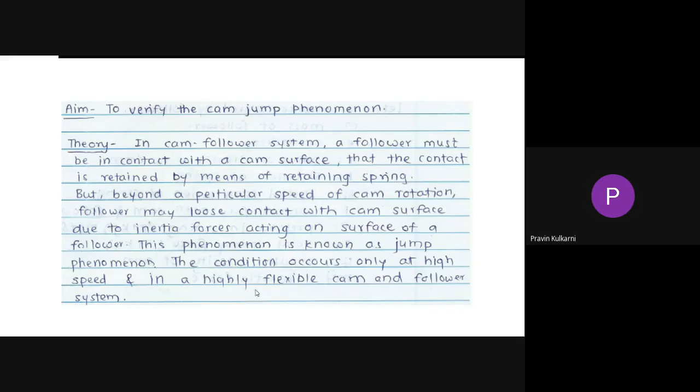So, I think this we have discussed, because as is our usual style, we discuss first and then we project the screen. Okay. The condition of jump occurs at high speed and in a highly flexible cam and follower system. So this we have seen. Now just read this out, because you are going to write this in your journal. How to write, what to do with the written material, where to upload, that I will discuss later on. Let's finish up the experimentation.

During jump, comma is there. During jump, follower loses contact with the cam surface, and when the follower reestablishes the contact, it may do so with severe... It's not sir, it's severe, huh? It is doing that with severe impact load that can damage the surface of the cam, and hammering noise, okay, can be heard at this speed. This we have discussed.

With jump, cam and follower separate owing to the excessively unbalanced forces exceeding spring force during the period of negative acceleration. The function of the cam follower system is to control and constrain follower motion. Okay. Also, life of cam flank surface reduces due to hammering, that is due to wear and tear. It also results in vibrations of the system.

Yes. The cam jump phenomena can be avoided either by increasing stiffness of the spring, or by limiting speed of cam, or increasing amount of preload of spring. Preload of spring. What is preload of spring? Again, we have to go back to the setup.

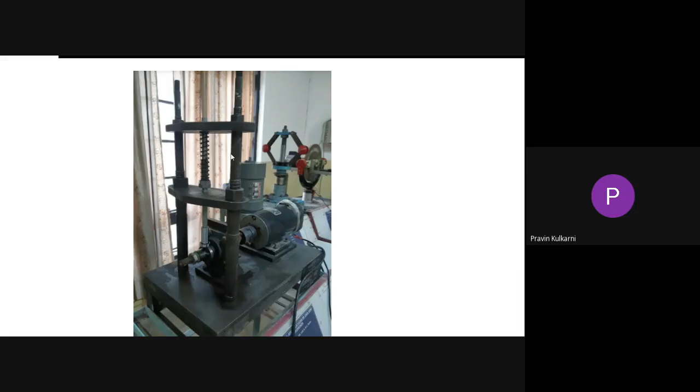Next slide. Let us try to understand the terms which are used in the mathematics behind this jump phenomena. Remember that mathematics is involved in all the dynamic systems. In fact, we can't keep aside mathematics while understanding the dynamic behavior. The system is in dynamic state. Remember that. So what is Y? Y is the distance covered by follower, or distance traveled by follower, or Y is the lift. See, if it is simply a circular disk, then ultimately it will not receive any lift. So what is lift of the follower? That we shall observe during experimentation.

M is mass of follower, E is eccentricity, R is radius of circular disk cam, K is stiffness of spring. So M, E, R, K are constant. These are called as system parameters. To change these parameters, what you have to do? You have to design a different cam or different follower. Okay. Next term, delta, is initial compression of spring. That is definitely variable by you and me.

Now, the cam is going to exert some force onto the follower so that they remain in contact. So that is called as contact force. F is contact force. It is not face force. You have to change while writing. Preload of the spring is mg plus k delta. I was talking about this, the self weight of the follower and the k delta term. So these two terms are clubbed and named as P. Preload of the spring means k delta plus mg. So total spring force is P plus ky.

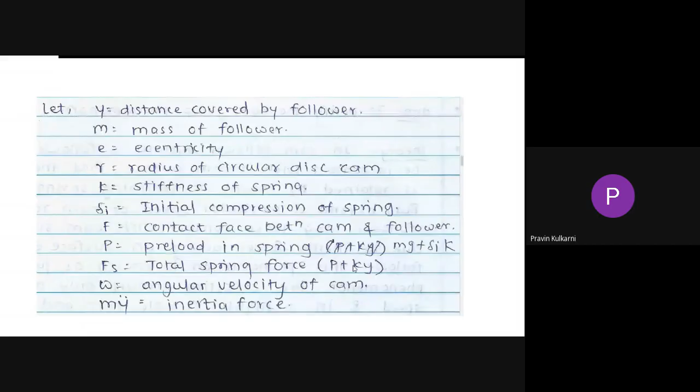Now see, spring is very important component of this setup. Now, when the motor is stationary, we are going to compress the spring. Okay. In the dynamic state, means when the motor is started, then ultimately further spring force will be due to lift which is gained by a follower. Try to understand this. Mg plus k delta is the static term. When we start the motor, then ultimately due to lift gained by the follower, you have additional force that is called as k into y.

It does mean that net force applied by the follower will be ky plus k delta plus mg. So keep in mind, three terms which are added, mg plus k delta plus ky. Are you getting my point? Now, RPM can be recorded by tachometer or stroboscope, that we shall do, and corresponding omega will be angular velocity of cam.

This inertia force. Now, in physics, we have learned that whenever the body is to be displaced, it must be given some force. Force is equal to mass times acceleration, isn't it?

So, acceleration will be caused due to the application of force, or you can say that whenever force is applied, that will cause acceleration. Whose acceleration? It is not acceleration of the cam, it is going to be acceleration of the follower. That is my y double dot.

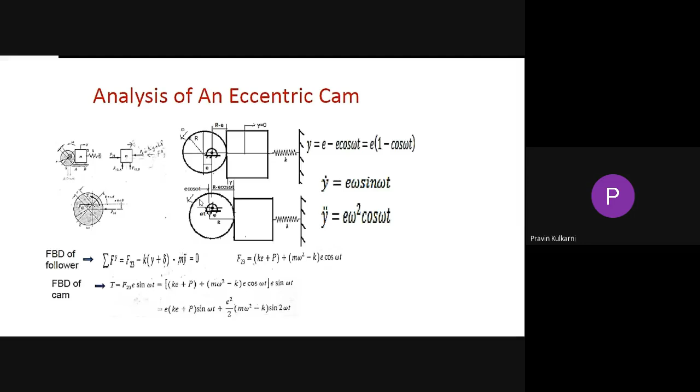Now as the follower is displaced in upward direction, the acceleration of the follower is in upward direction, meaning inertia force is in downward direction, spring force in downward direction, and the force exerted by cam on the follower, however, will be in upward direction. So next, now actually this is not needed. This is actually a part of dynamics of machinery. I will skip it. I will explain to you during dynamics of machinery. So with that, we have F equal to My double dot plus Fs.

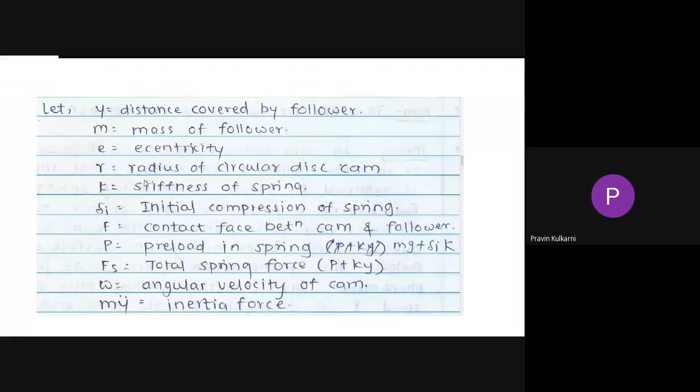We have discussed it is P plus Ky. What is P? You have to go backwards. P is called the preload, which is Mg plus K delta. So let's quickly go through that. F equal to My double dot plus, what is P? Mg plus K delta plus Ky. So finally you have F equal to My double dot plus Mg plus K delta plus Ky.

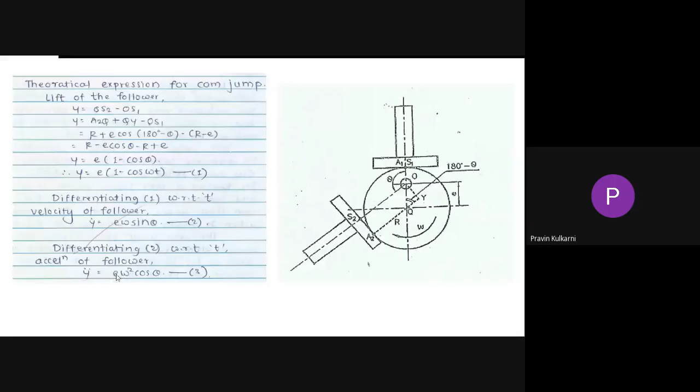F is equal to P as it is, but P is, remember, Mg plus K delta, plus K into Y. What is Y? Lift of the follower. It is given by E into 1 minus cos of theta. How we have derived. Plus mass of the follower into Y double dot. What is the equation of Y double dot? Yes, it is known to you. E omega square cos of theta. So you have F equal to P, Mg plus K delta, plus K into bracket plus M into bracket. You have F equal to P plus K into E plus, now these terms are simplified.

You have to work on equation number 4. All similar terms are clubbed together. You have minus Ke cos of theta. This is minus now. Minus Ke cos of theta and M omega square cos of theta. So cos of theta is common. In fact, E is common. K into E cos of theta with negative sign, and this is cos of theta. So for the second and third term, you have E cos of theta multiplied by M omega square minus K. This is mathematics.

What next? As already said, when the motor is stationary, the contact force is highest. That corresponds to the lowermost position of the follower. Remember, theta equal to 0, lift is 0. It means that the follower is in the lowermost position. Remember, at that stage, contact force is maximum, meaning you can put theta equal to 0.

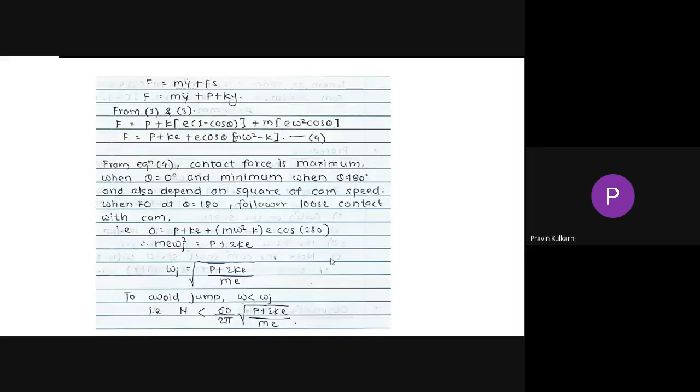So theoretically what we shall do: we know K, I will let you know that. K is known, E is known, M is known. P is mg plus k delta. Mg is also known. K is constant. So we shall put different values of delta as 2, 4, 6. We shall find out the theoretical speed first, and then we shall perform the experiment. We shall check for delta equal to 2 whether theoretical and experimental are matching or not, and then we can conclude based on that.

So the setup consists of an eccentric cam and follower with a follower spring, and at the jump speed the contact force becomes 0. Okay. The specification of the setup: it contains a DC motor, half HP, 230 volt. Spring stiffness is 892 Newton per meter. Free length is 106 millimeter. Mass of the follower is 0.354 kg. Cam dimensions OD, ID, eccentricity is 2.

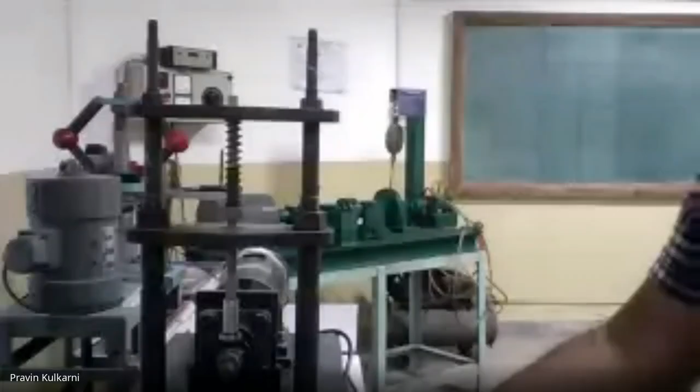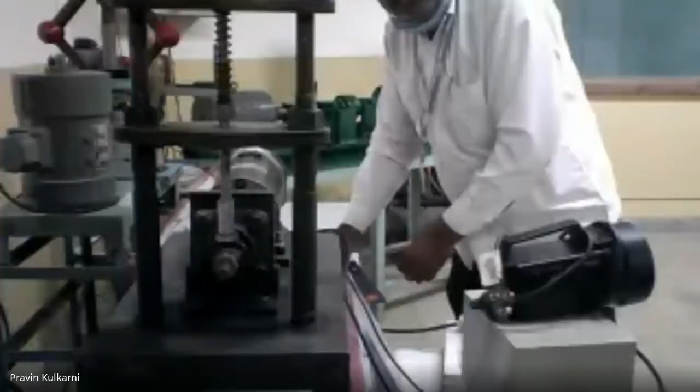Shubham and Himanshu, are you present? Or anybody, Joglekar, Surnis? Are you able to see my mobile? Yes, sir, able to see now. Can you see my mobile? No, sir. Speak loudly. Because see, I have to ensure that you see base and top. So can you see the mobile? Yes or no? No, sir.

Now, are you able to see? Yes, sir. Okay. Now, are you able to see mobile? Yes, sir. And you are able to see the two pillars, two columns? Yes, sir. Very good.

What we shall do now? We shall measure length of the spring, and it will be 106, no doubt. We shall compress the spring by 2 millimeter, isn't it? Then we shall start the motor and observe what happens to the noise. Okay, so please be attentive. Is video clear or blur is there? It is somewhat blurry, sir. That is going to happen.

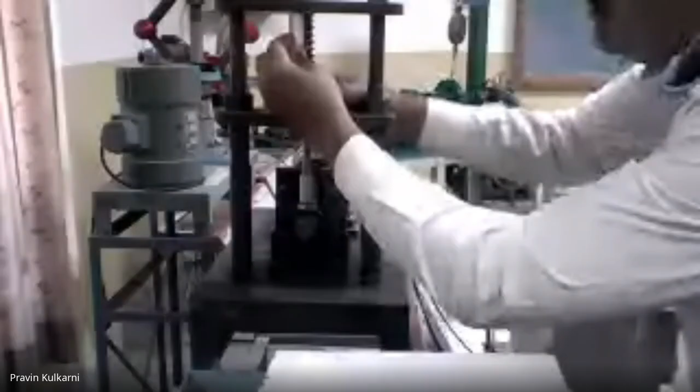See, with the help of the scale, the length of the spring is adjusted to 104 millimeter because it is 106 initial. Now it is 104 means deflection by 2 millimeter. Upper nut is taking care of compression, and the lower lock nut will ensure locking of upper nut. Once it is done, then the lower nut is locked. That is called as lock nut.

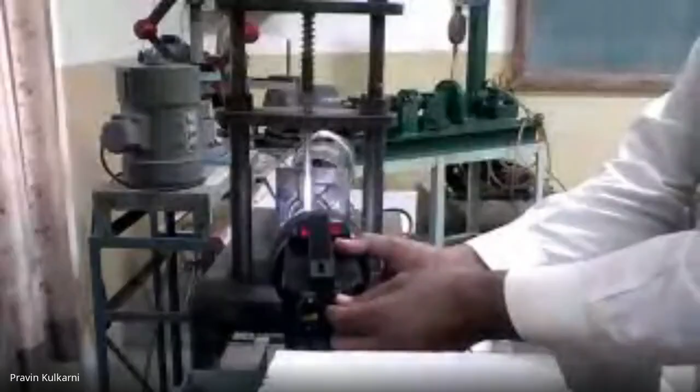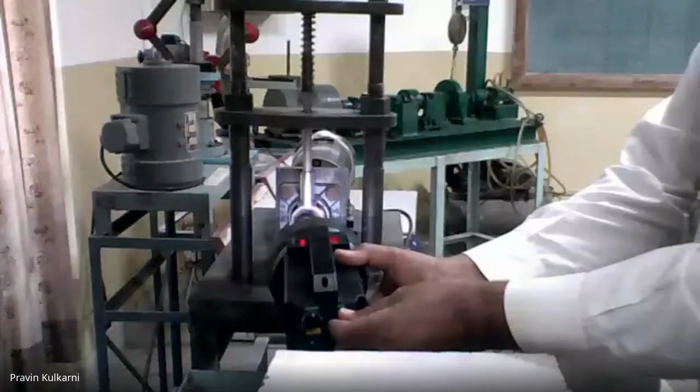Now, are you able to notice change in quality of sound? This is the speed which is to be recorded because this corresponds to loss of contact. This is called a jump speed. The follower is trying to contact the cam. While doing so, impact load is being applied onto the cam. So we shall record with the stroboscope. You might be knowing principle of stroboscope. When the frequency of flashing light matches with the RPM, the object will be appearing as stationary.

Now the cam is appeared as stationary. So please record this observation. The speed is 1288. At 2 millimeter, speed is 1288 RPM. Okay. Now what we shall do? We shall stop the motor, and again deflection will be adjusted to 4 millimeter. So I will write on group 2 millimeter, that has given us 1288 RPM, so that it will be referred later on. 4 millimeter, we shall enter the RPM. 6 millimeter, and then did you see the stationary cam?

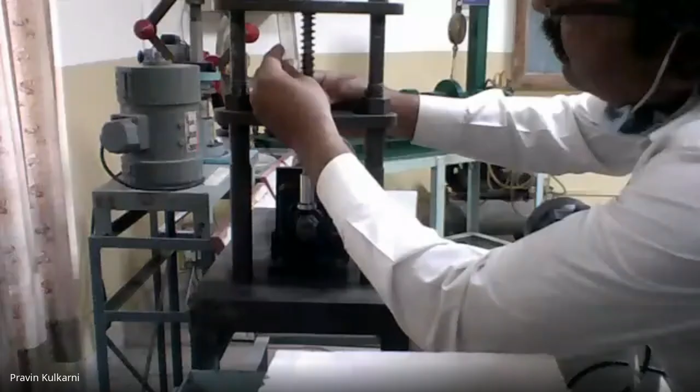Are you able to listen to me? Yes, sir. I'm asking you, when the lights were flashed by the stroboscope, did you notice that stationary cam? Actually, it was not very clear. Okay, means it was out of vision of the camera or it was blurry. What you mean to say?

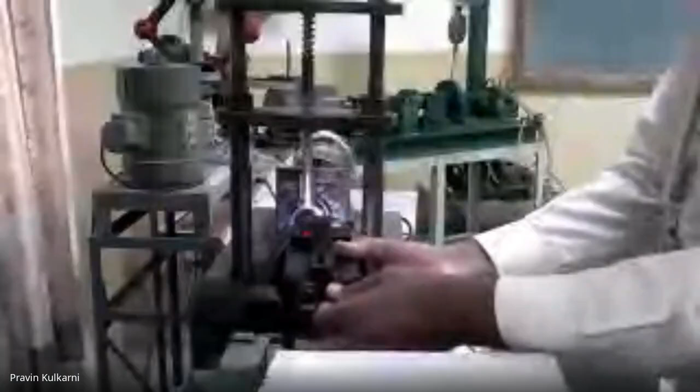Lag, but it was kept there for some definite point of time. So let's see. Now 4 millimeter. So for 4 millimeter, RPM is 1300. RPM is 1300, and there is correction for 2 millimeter. It was 1188. I repeat, for 2 millimeter it was 1188 RPM. For 4 it is 1300. The final reading, 6 millimeter.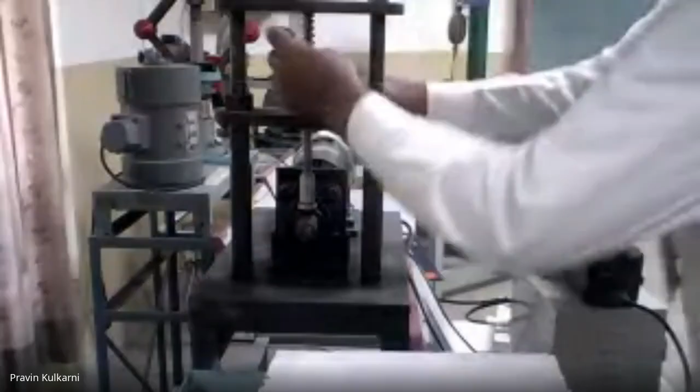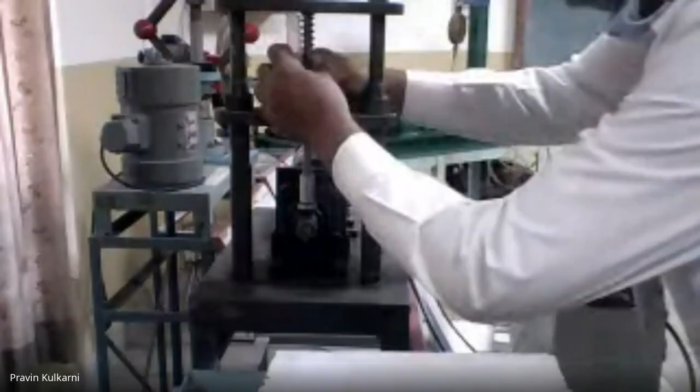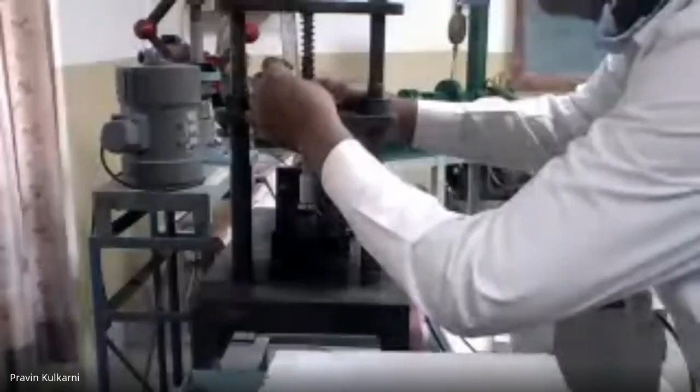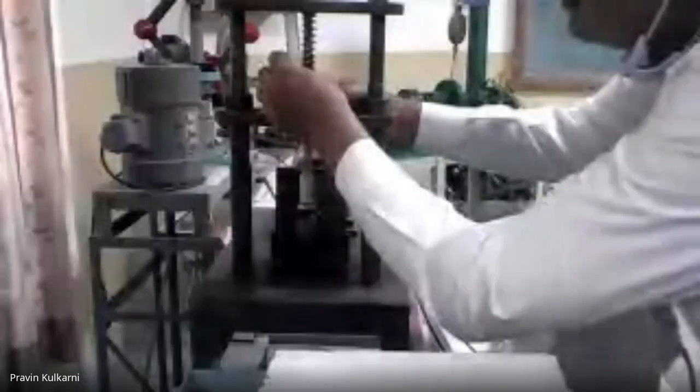Shambhat, 100. Now it is 100 millimeter as spring length, means deflection is by 6 millimeter. This will be the final reading. But don't leave at the end of the final reading. We have to discuss more on this. Now, this is the hammering noise.

So please note down, it is 1419. Well, thank you. So I have posted the readings on your group. So to summarize, for 2 millimeter, it is 1188. For 4 millimeter, 1300. For 6, it is 1419 RPM. Chala, thank you. Yeah. Just wait.